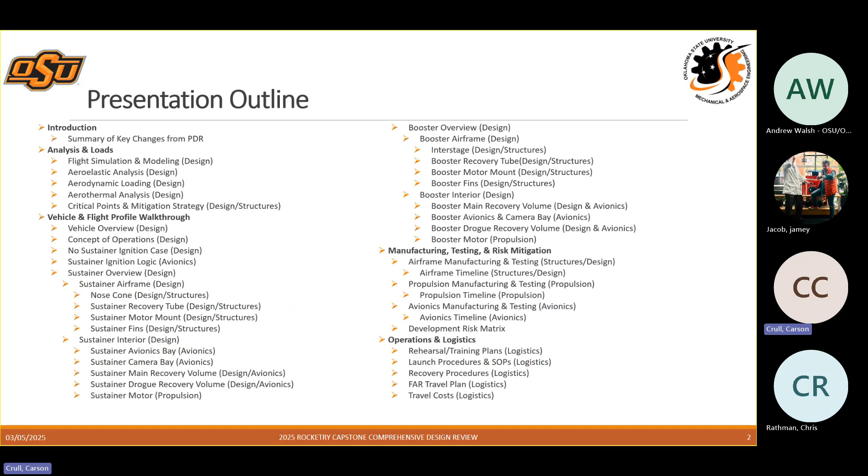Good afternoon. Welcome to this lovely Wednesday afternoon where we're going to be doing our comprehensive design review of Sundance, which is our 50-kilometer aerospace rocketry capstone project. Let's jump right into it. First up, we've got our outline, which is reference for us planning and also for people doing this in the future, so we'll see what the section breakdowns are. But we're going to go right into our summary of key changes from PDR. It's going to be at a very high level, and this will be the rest of the presentation.

We'll spend time going in detail on all these changes. These are the key points to watch for through the rest of the presentation. The major one is the confirmation and locking in of FAR as our launch site. Previously at PDR, we were hoping to have a launch site at the Osage Nation land north of Pawhuska. Unfortunately, that appears to have fallen through, so we have now fully committed to a launch at Friends of Amateur Rocketry, a highly regarded field out in California in the Mojave Desert. It's a very long drive away, about 22 hours, so we'll get into the logistics of getting the rocket and team over there, and some other considerations playing into that as well.

One of the chief changes is the redesign of the fins on both the sustainer and booster of the vehicle, driven by the tower at FAR. We're unfortunately abandoning the tower concept we'd been working on at PDR and moving forward using FAR's Newman 20-foot launch tower, which is designed to accommodate 4-fin rockets. We made a quick trade, deciding that the difficulty of adding more fins, performing the analysis, and validating that would be way easier than trying to haul our own tower out there. With that, we did some geometry adjustments, redid our flutter analysis, and increased those margins.

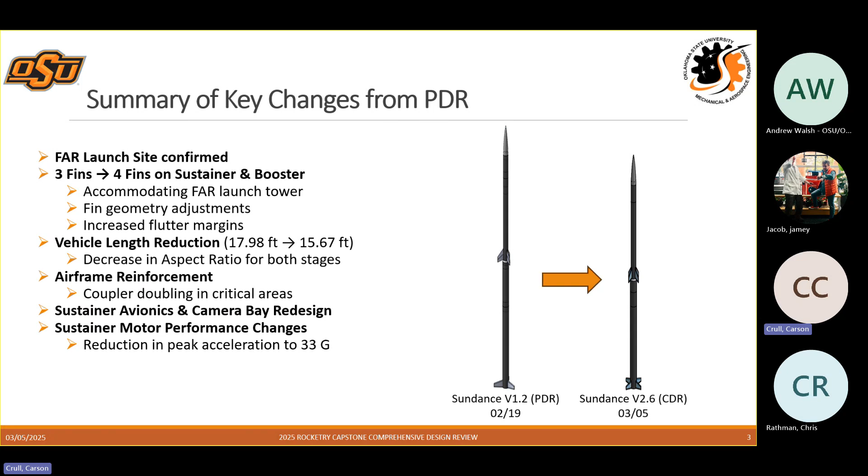I guess we're going to jump right into the vehicle walkthrough. We'll be handing this over to our design lead, Landon Votes, who will take you through the overview of the vehicle. All right, apologies, sorry, we're going to go analysis and methods first.

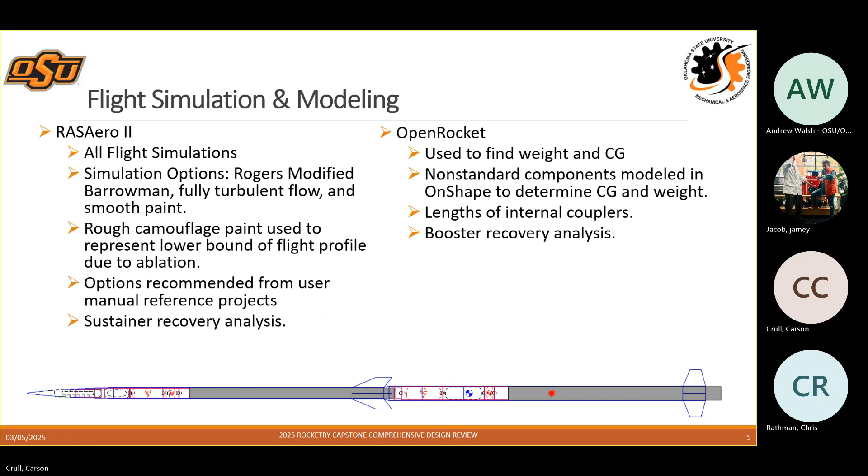Now moving into our static stability analysis. The stability margin is the distance from the center of gravity to the center of pressure, divided by the body diameter. You can pretty easily adjust this by changing your fins around, and you need at least one stability margin for subsonic and two for supersonic.

Now moving into dynamic stability. The static margin affects your dynamic response. The image on the left is our first 20 seconds of flight, generated from RASAero. One disadvantage of RASAero is that you can only select one wind velocity, and it stays the same for the whole height. So we're looking at using RocketPy to run more simulations specifically for winds, and Jackson's going to talk about that with our Monte Carlo sims coming up.

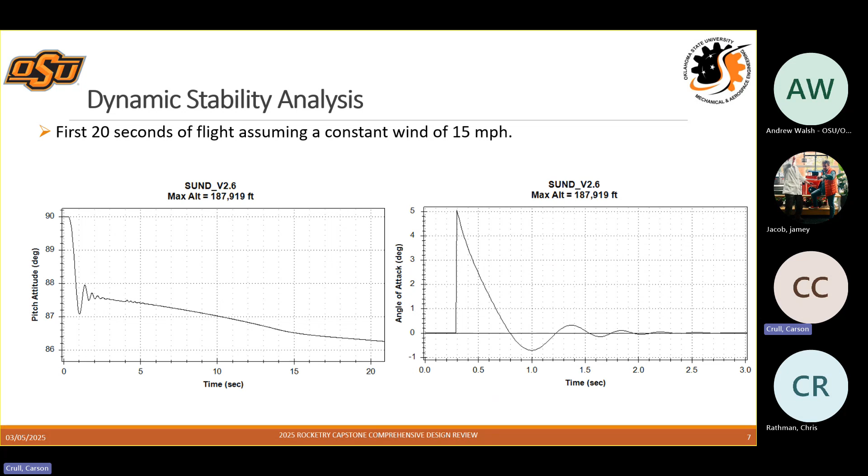We're going to jump into some Monte Carlo simulations, and we did have some updates from PDRs requested, accounting for the plus and minus 10% propulsion effects of the engines if it's either more powerful or less powerful than we expect.

And then we got the FAR atmospheric mapping. So we actually put in latitude, longitude, and elevation to get the wind degree and wind speed, as well as the air density mapped up all the way to 80,000 meters. This is going to be really critical when we talk about where the rocket's going to land, whether we're staying within a safe margin, and if it's going to be too windy on the day to launch.

Some of the initial results we had were keeping that under a 30-kilometer landing radius. We're seeing between 24 to 26 kilometers for our normal distribution curves, which we'll show on the next slide. We did have simulator consistency as well—OpenRocket's still showing that 26-kilometer radius, and we included the 10% motor performance to see the fluctuation in landing distance based on that.

As Landon mentioned, with RocketPy in the future, we're going to use the RocketPy library to take into account all the trajectory mapping with a 6 degree of freedom simulation. Essentially this is going to show a 3-axis chart displaying the parabolic trajectory of the rocket, so we can get a great idea of where it's going to land based on worst case wind loading. This will give us precise landing zones.

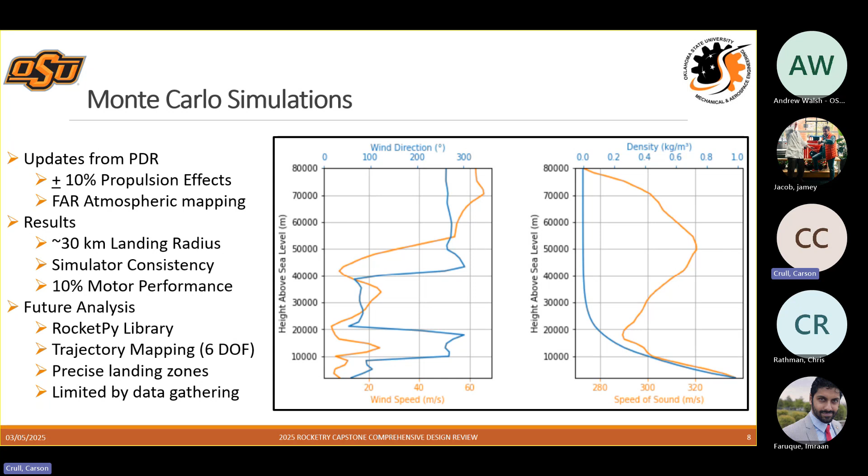One of the reasons we haven't got to this yet is the data gathering we have to go through. In order to successfully do this, we're going to need spreadsheets once the motor's finalized, and get all the grain profiles and burn profiles from that, plus stuff from the avionics bay and recovery system, to make sure the parachutes we're using are correct in RocketPy and things of that sort.

So going into our results, this is what we're seeing with our 2 degree of freedom simulation currently. With a 10% motor regression, we're seeing that normal distribution peak around 26 to 28 kilometers. With a 10% motor progression, we're seeing that drift closer to 30 kilometers, but still staying in that 26 to 28 range. Overall, this is consistent with what we've been seeing.

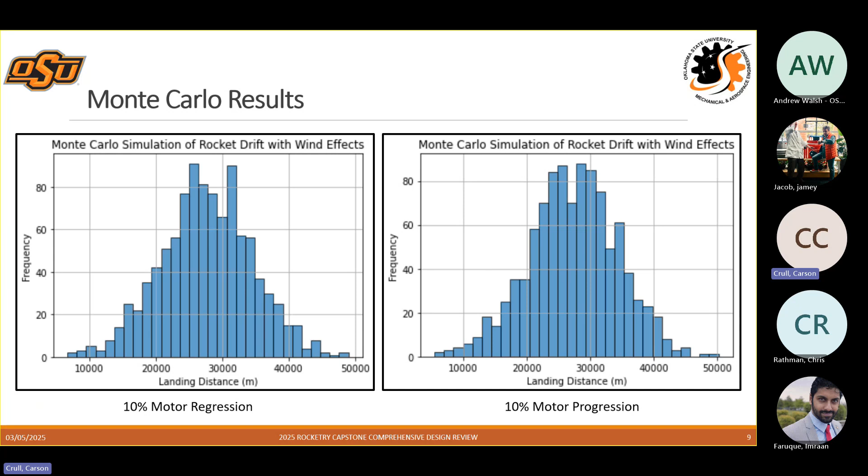One thing we might talk about in the future is once we get that RocketPy simulation done with a 6 degree of freedom simulation, to see how accurate that is compared to this. Obviously there will be some discrepancies, but what we're hoping is all the parachute geometry and stuff lowers this significantly.

Hi, my name is Dev. I'm a member of the design sub-team, and I'm going to be talking about the fin analysis and the methods we used. We used two methods: one using a software called AeroFinSim, and the other by hand calcs, using a method published by Apogee Rockets in newsletter issue 615.

For AeroFinSim, it takes the geometry of our fins as an input, as well as the altitude at which the set of fins experience max Mach. It uses these two equations to give us a fin flutter and divergence critical Mach number, which we cannot exceed.

For our hand calculations, we used the main equation shown on the right. We made a MathCAD file which calculates all those values and gives us the fin flutter Mach at the end. A key thing to note about this equation is that the 39.3 constant does depend on our fin geometry, so we recalculated that constant for both sets of fins.

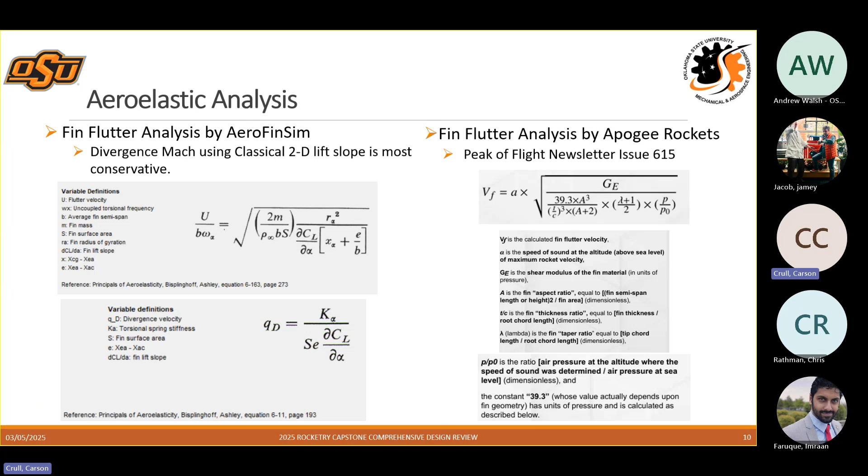We used two methods just to make sure that they validate each other and ensure that one doesn't drastically change the other. These results will be shown later.

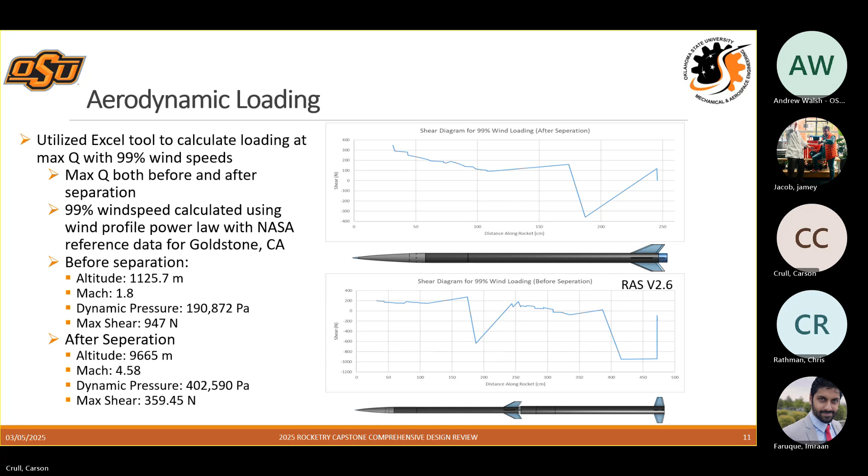We also did some analysis for our drag separation this time. How we did this is we found the drag produced by all of the different aerodynamic surfaces of our rocket, both sustainer and booster. Then we subtracted the sustainer drag from the booster drag to find out how much force was pulling our booster away from our sustainer.

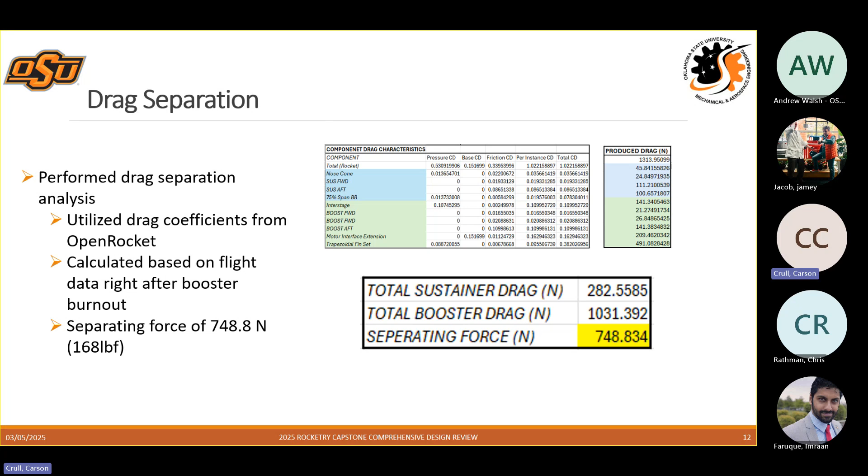Going into a lot of the aerothermal analysis, this has proved to be one of the more complex simulations we have to deal with. From PDR, we have an updated design render using the most up-to-date RAS Aero simulations. This gave us higher temperatures due to longer sustained supersonic flight.

A couple of the assumptions we made in the simulation was a fiberglass nose cone model with no ablative, to get the pure raw temperature on the surface if we didn't put something on there. This proved that the nose cone resin risked melting upwards of around 500 degrees Celsius, as well as we have conductive heat transfer to the E-bay and body tubes caused by the boundary layer.

On the heat flux topic, we're talking about 4 seconds to max heat flux from sustainer ignition, as the booster is not going as fast as the sustainer. So these are the higher temperatures we're expecting, as well as 8 seconds to around the max temperature, which is a lot longer than we saw on the PDR, which is why these temperatures are climbing and thus result in needing an ablative.

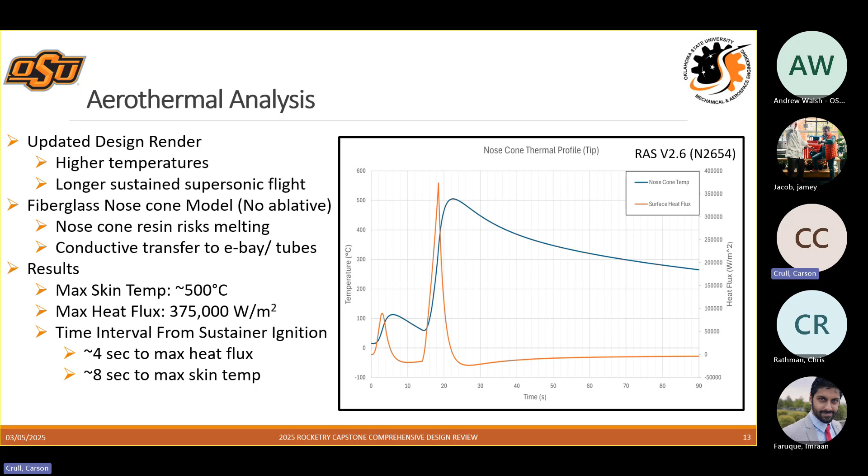This proves this will require an ablative coating, and what we see from this is we're above around 500 degrees right where that tip's going to start, and then all the way down to 400, and that temperature is going to keep decreasing as the rocket cools down and comes back down to altitude.

We ranged this just based on the material specifications in the code. So it's going to take a while to get the properties of the aluminum, size the aluminum tip, get the thickness we need. Aluminum also has a higher heating coefficient than fiberglass, so we've got to consider that as well, as that can conduct more heat to the nose cone, things of that nature.

Hi, my name is Chase Whitfield. I'm part of the structures sub-team, and I'll be talking a little bit about our composite airframe structural analysis.

So first, I'll just give a little summary of my approach. I made a MathCAD tool that does the analysis using classical laminate theory, or CLT.

To start out, I took our tow and epoxy properties that were given in the 54 millimeter tube we tested, and from there I was able to get the A, B, and D stiffness matrices calculated. After that, I took our max external loads, NX and MX, to compute the strain and curvature in the X direction. I took these at the maximum loading conditions under the critical sections, which we'll get into later. Also, this is just looking at a hollow tube, not with any couplers or extra thickness added to it.

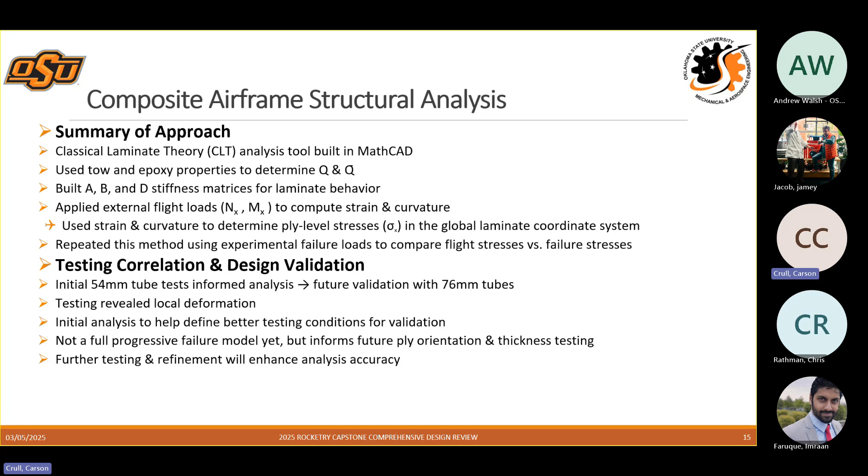So it's not quite a full progressive failure model yet. It still needs a little bit of refinement, but it helps inform future ply orientation and tube thickness testing moving forward. With that further testing and extra refinement, it'll enhance the analysis accuracy.

Again, our interstage coupler interfaces are of particular interest because that is what contributes to the slop along the overall length of the rocket. And there are also, in many cases, where our rocket will separate to start that recovery process, so multiple points of interest there.

Again, our nose cone tip interface, as you heard with the aerothermal analysis slides, we're going to have a lot of heating here, and a lot of stress just from where that aluminum tip interfaces with our fiberglass.

And then lastly, going off of what Chase covered in the previous slide, that preliminary structural analysis on our old design that you saw during PDR actually showed a negative margin of safety based on the material data from our 54 millimeter testing. So obviously steps need to be taken to address that. We're going to reevaluate these analyses with the results of our 76 and 98 millimeter tests. I'd like to reiterate this is very much preliminary, but it does help us inform these design decisions going forward.

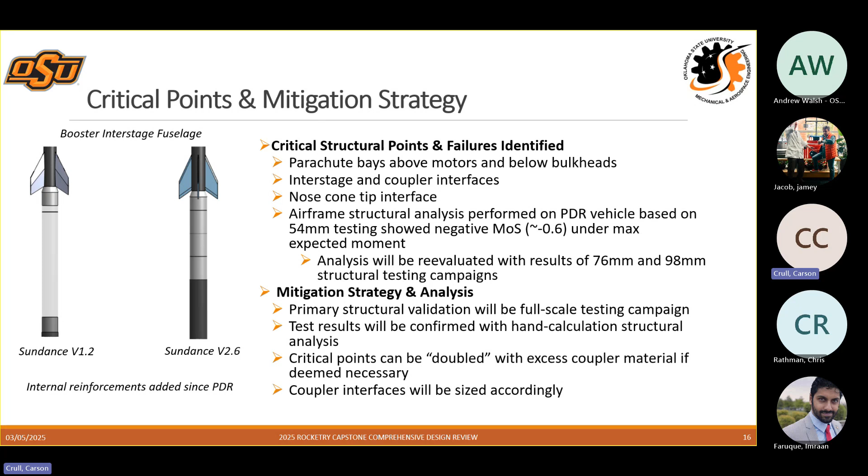And then lastly, as you can see in the images on the left, these critical points can be doubled where necessary with excess coupler material. So that's kind of our current approach. You can see the design change that we've made, and these interfaces will be sized accordingly based on those analyses and our testing results.

All right, so now we're going to go walk through the entire vehicle.

Starting with the overview of the entire Sundance rocket, the takeoff weight is a little heavier now, at 78 pounds, 3 pounds heavier. There's still 2 stages. The booster motor is the same, the Aerotech O5500X. The sustainer motor is different, and Trey's going to talk about this later, but it's still a custom OSU-made motor, though now the designation is N2888 instead of N3170. It still has the minimum diameter transition/interstage piece, where the booster outer diameter is 104 millimeters and the sustainer outer diameter is 80 millimeters, still made out of in-house carbon fiber wound body tubes.

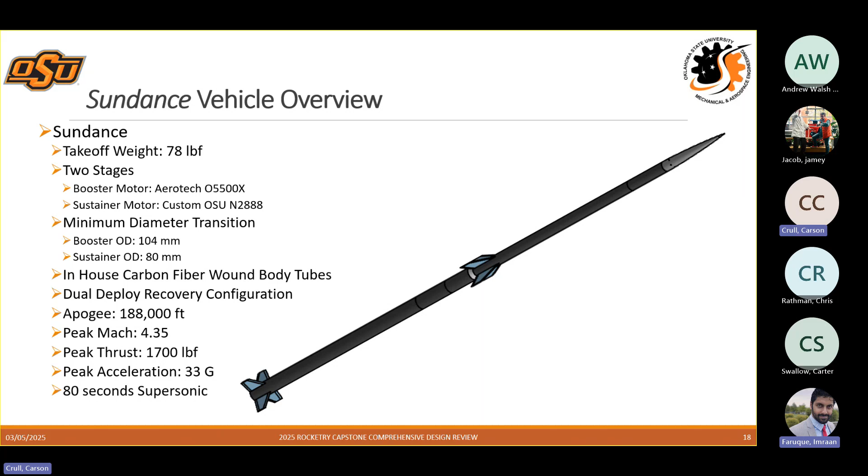Still with the dual deploy recovery configuration, our apogee is around where it was last time at 188,000 feet. Our peak Mach has decreased a little to 4.35. Our peak thrust is the same as before, driven by the O5500 at 1,700 pounds. One of the biggest changes is our peak acceleration has decreased from around 50 to 33 Gs, and that's due to the changes Trey's going to talk about with the custom OSU motor. We're still spending around 80 seconds of our total flight supersonic.

Now our concept of operations. The only things that have really changed here are our peak Mach number and altitude. We're still going to take off from our 20-foot Newman launch tower, now with 4 fins instead of 3. The booster is going to burn out at 5,000 feet after 4 seconds. If we follow the booster, it's going to continue to climb, lose velocity, and eventually reach apogee 25 seconds in. Our drogue is going to deploy at 15,000 feet. Then our booster descends until it reaches 2,000 feet, and the main parachute deploys from there. The booster lands 330 seconds into the flight.

Meanwhile, our sustainer continued to coast for 10 seconds after booster burnout. This 10 seconds keeps us above Mach 1 the whole time, so we don't drop below and shoot back up again. It also helps with that pitch attitude I was talking about earlier, keeping it as close to vertical as we can. Ignition occurs at 19,000 feet, and then our sustainer reaches max velocity 4 seconds later at 4,300 feet per second, at 29,000 feet.

The sustainer has a long coast all the way up to apogee, reaching 188,000 feet 115 seconds into flight. This is where the drogue will deploy, descending from 115 seconds to 700 seconds, a long time under drogue, just because of how high up in the atmosphere it is. At 5,000 feet, the sustainer's main parachute deploys 700 seconds into the flight, and about 250 seconds after that, or around 1,000 seconds into the whole flight, the sustainer will be on the ground. We'll touch on this as another change, the increase in elevation on the sustainer main deployment altitude, and we'll talk about that a bit later.

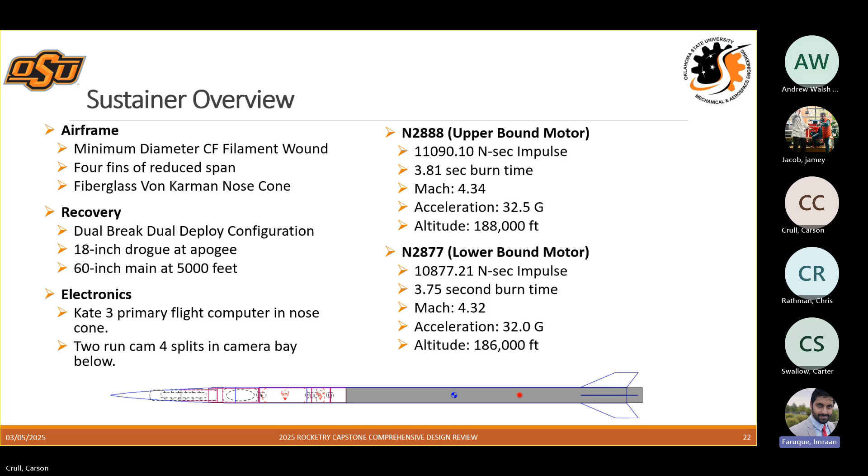Now going into the actual airframe, that's the carbon fiber, the black carbon fiber tubes you see in the image on the right. Our structural weight range is 8.14 to 9.24 pounds, so about 1.1 pounds difference. That's just taking into account what if our carbon fiber weighs 20% less than expected, and what if it weighs 20% more. It doesn't change the total weight of the rocket too much, so that's kind of what we're looking for there.

The overall length of the sustainer is 102 inches. The biggest part is the motor mount tube at 61.5 inches, so that'll be one full mandrel from structures. The recovery tube is smaller at 13.75 inches, that was one of the pieces we reduced in length to reduce the overall aspect ratio of the rocket. Our nose cone is at a solid 24 inches.

Our motor overhang, where the motor hangs off the back of the sustainer, the inner face with the interstage below, is one body diameter right now, so 2.99 inches or 76 millimeters. The outer diameter, including the thickness of the tubes, is 3.15 inches or 80 millimeters. The inner diameter is 2.99 inches or 76 millimeters, and the thickness is 79 thousandths or 2 millimeters. So the OD and thickness, the inner diameter is set by the mandrel, but the OD and thickness can change depending on the manufacturing methods and the results of our testing campaign.

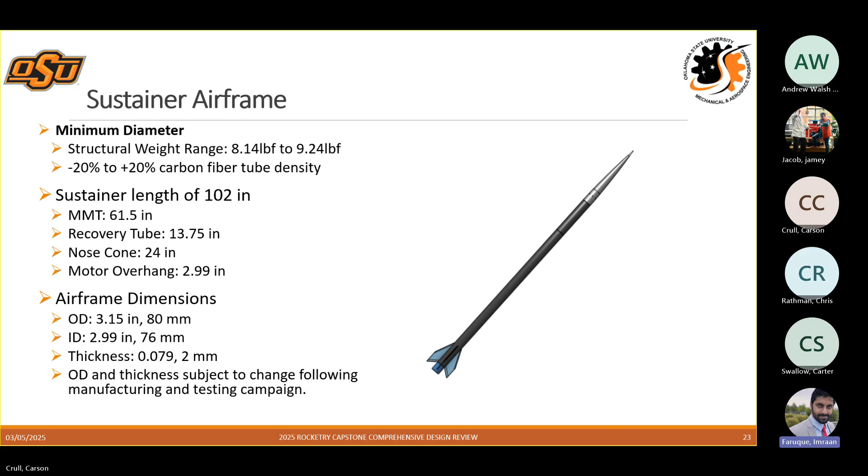For the nose cone, Ethan developed a manufacturing method we plan to use with a 3D printed mold, and we'll hopefully start that tomorrow. I've been working on the stress calculations, using the Newtonian flow method to determine the axial and radial force acting throughout the nose cone, done at a flight condition of 4.34 Mach and 29,000 feet. I also plan to do the classical laminate theory, which I'm currently working on to determine the ply number, and we plan to do testing on our fiberglass to get all of our ply properties for that. The predicted ablative regression requires a 1.5 millimeter thick coating for a factor of safety of 2.

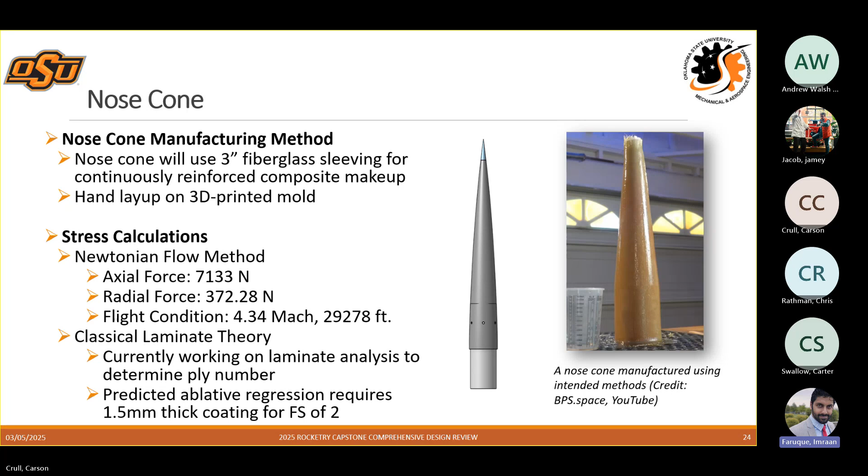Backing off what Anna said about the nose cone, we did a CFD analysis using ANSYS. A couple of the input flow conditions and simplifications we used: 2D axisymmetric flow to simplify the overall analysis so it wouldn't take weeks, and a 2D mesh with over 500 surface segments to increase accuracy. For input flow conditions, we have a max dynamic pressure given by RAS Aero V2 of what this rocket's flying at, which is around Mach 4.6. This Mach number differs from our updated simulation because this was run on an earlier simulation to see where we were at very high Mach numbers.

The temperature, pressure, and density were all around 28,500 feet, which is around the sustainer burnout—again, this differs because it's an earlier simulation. Another big simplification is a no-slip condition at the nose cone wall, to avoid viscous effects interacting with our rocket and its boundary layer. These results show pressure distribution over the entire rocket, ranging from 500,000 to 660,000 pascals, with about a 15 degree oblique shock from the tip of the nose cone based on the horizontal axis, and a pressure distribution for load validation and FEA. So we're working towards a full vehicle CFD analysis, which will give us a pressure distribution over the entire rocket so we can make further changes to the airframe, fins, or anything else. Structures will get into more of that later.

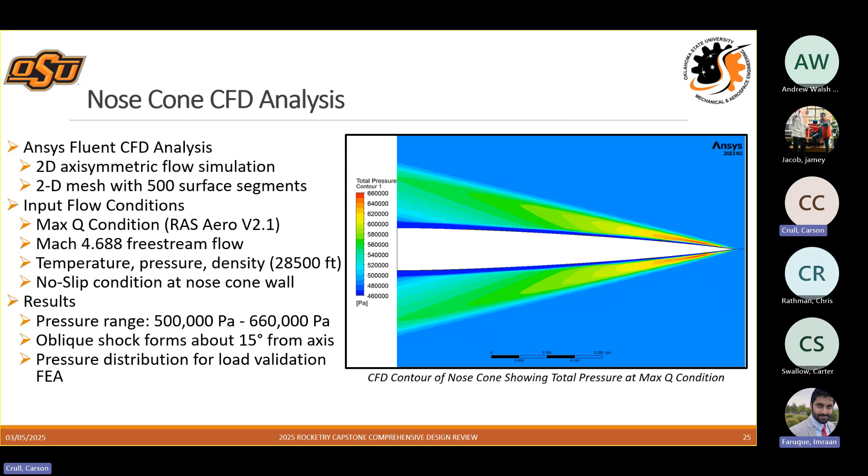Now moving down the rocket, the next piece is the sustainer recovery tube. The upper part houses our main, and the lower part houses our drogue. The black part you see is 18.5 inches of carbon fiber. It's joined to the nose cone with a roughly 10-inch coupler, and joined to the sustainer motor mount tube below it with an 8.98-inch coupler. The parachute bulkhead is right in the middle, dividing them, with an eye bolt on both sides so the recovery is attached at the same spot. The shear pins are below the shear line or joint at each interface—for this, the motor mount tube would slide up here, and the shear pins would be in this section. This is the sliding part of the coupler, which is also 1.5 times the body diameter on both the sustainer and the booster. This gives you a good interface.

If your tolerances are good, you'll minimize the slop there. If you go longer, you're increasing the overall aspect ratio of your airframe, and also the chance that it won't actually separate because there's too much friction. So 1.5 is a happy medium there.

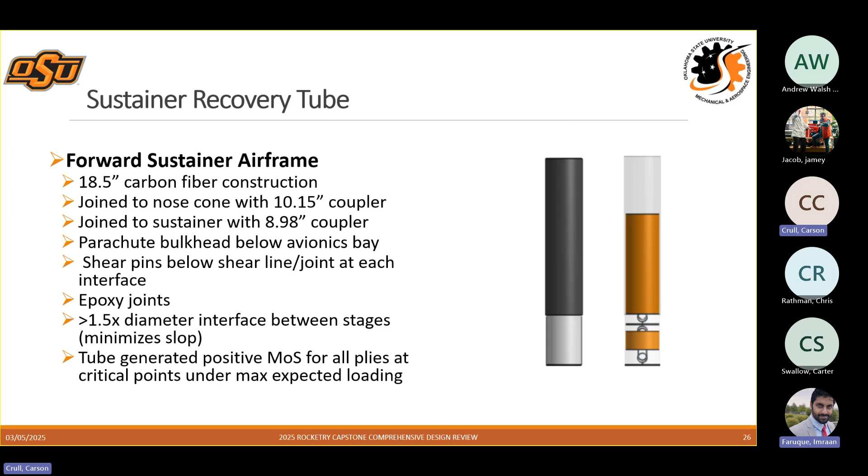This tube generated positive margin of safety for all the plies at critical points under max expected loading, because of the additional coupler and reinforcements we added in that area. We'll see that later.

Now moving further down the rocket, we get to the sustainer motor mount tube. That's the very long 61.4 inch carbon fiber piece. It is joined to the forward airframe with the same 8.98 inch coupler, and then it's joined to the interstage with the motor case, which is this blue piece hanging out 3 inches. It interfaces with the interstage below that. Also living in this tube is the drogue parachute and our custom motor retainer.

All the bulkheads on the entire rocket are epoxied in place, and our custom retainer basically works with the forward closure on the actual motor, and then we have a bolt that goes through there, threads into a slot on the top of the retainer, and we tighten that until it fully interfaces with our epoxied-in-place retainer. This has to be custom because commercial retainers have a center threaded piece, and we have to do a slight offset to accommodate the head end ignition. The shear pin connection is also below the shear line on this one as well.

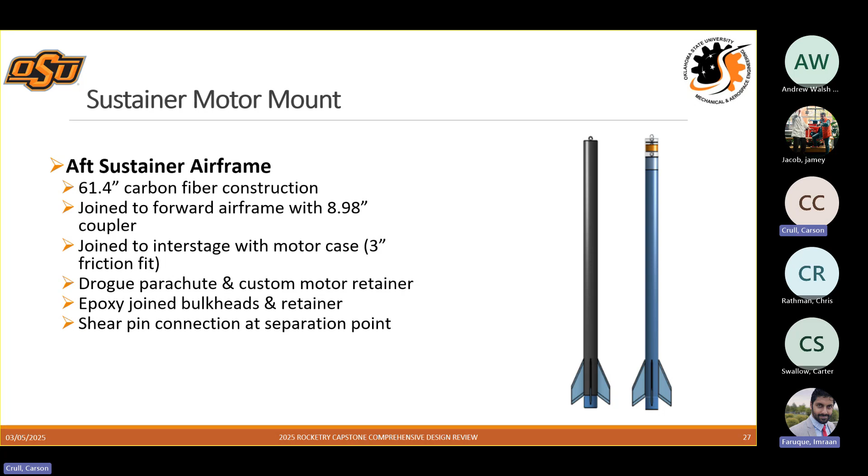Looking at our sustainer fins, besides the main change from going from 3 to 4 fins, the biggest change we made is going from double wedge to hexagonal cross section. In simulations, this change didn't have that big of a performance difference, and hexagonal fins are easier to manufacture and more robust, so we decided to switch. They're also highly swept, which is needed since the sustainer is going to go Mach 4.3 - a highly swept fin helps with performance at that speed. The current plan is to construct these fins out of 6061 aluminum with epoxy fillets.

Using this material and geometry, we can conduct fin flutter analysis using the methods previously discussed. The critical Mach number from AeroFinSim is about 9.5, and by hand calculation it's about 12.1 - about a 2.5 difference, which is quite significant. However, the average factor of safety we get is 2.5, which is ideal, making this a good sustainer fin design.

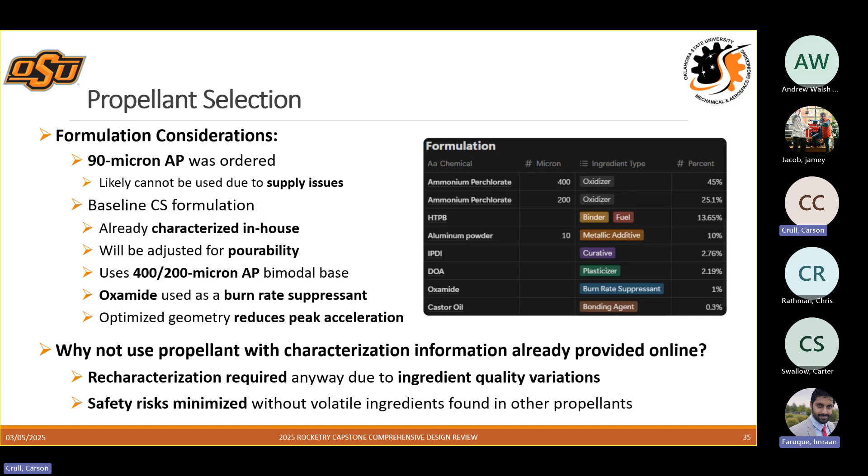So it's been mentioned, the performance bounding of our motor design. I'll explain a little bit more about what that is. Since we were originally planning to utilize 90 micron AP and we can't do that, we use this bounding approach. Our baseline propellant, already characterized, needs to be refined for improved pourability. So to make sure our final design is suitable for loading and such, we define two bounds to guide our motor development.

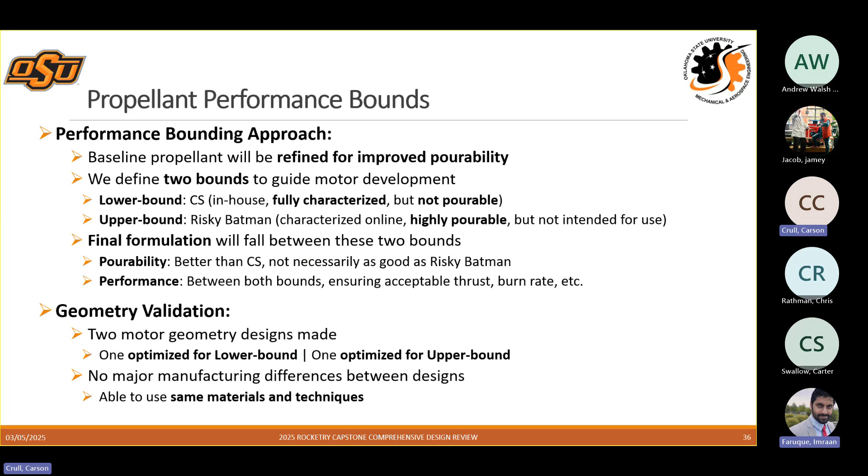Also in terms of performance, we were able to optimize geometries for both the upper bound and lower bound, so that we know the performance of our final motor will fall between those two bounds. We optimized a geometry for both propellants, one optimized for CS and one optimized for Risky Batman, and concluded that there are no major manufacturing differences between the designs, and that we would be able to use the same materials and same manufacturing techniques.

All right, so now that we're done with the sustainer, we're going to move into the booster overview. Still the minimum, same carbon tubes. We did reduce the 4 fins and reduce their span, which helped us with the flutter velocity. On these, we also slightly increased the thickness.

On top of our boosters, our 6061 T6 aluminum interstage provides the connection point between the two stages. The recovery is the same dual break dual deploy as the sustainer. There's a larger drogue and larger main, just because of the increased mass of the booster.

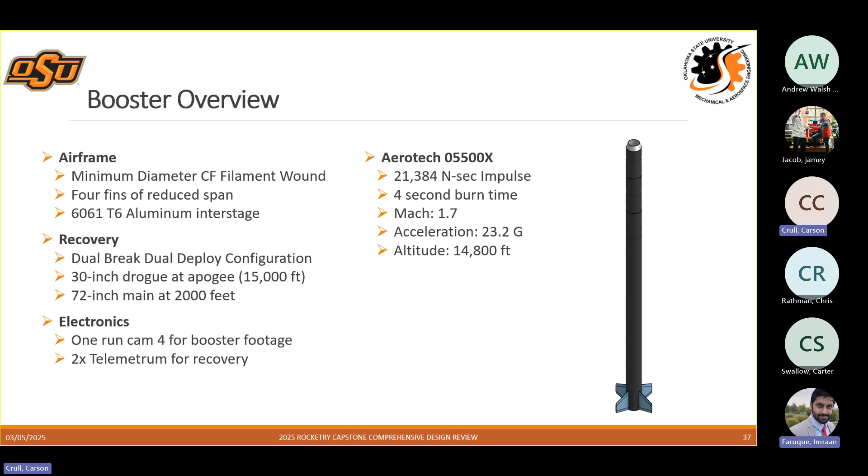The electronics include one RunCam 4 for our booster footage, and then two Telemetrums for recovery, which are some other commercial flight computers. The motor for this booster is still the Aerotech O5500X with 21,384 Newton-second total impulse, 4-second burn time. That's going to push the whole booster and sustainer stack at separation to Mach 1.7, peak acceleration of 23.2 Gs, and altitude of 14,800 feet.

For the airframe, we did the same positive and negative 20% carbon fiber analysis, and that put us at a similar difference of 10.9 to 12.3, a little more variance there just because there's more carbon on it. The booster's length is 94 inches, with the largest segment being the aft booster, or the motor mount, at 67.3 inches.

The forward booster, which is kind of the recovery volume, is 20.8 inches. Our interstage, the part that's actually visible to the air, is 1.5 inches long. And our motor overhang is 4.4 inches.

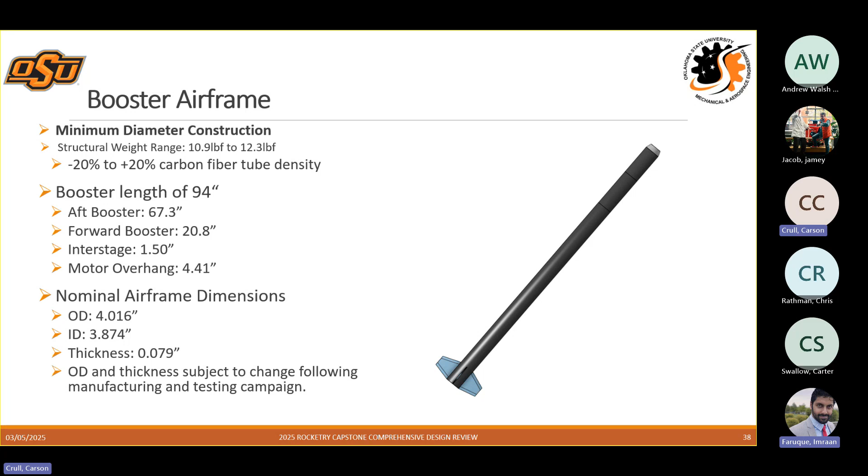The nominal dimensions, like I said earlier, are an OD of 4.016, an ID of 3.874, and still the same thickness of 79 thousandths or 2 millimeters. Same disclaimer that the OD and thickness are subject to change following our manufacturing and testing campaign.

Yeah Josh, you got the interstage. So taking a look at our interstage, there's been very few design changes between PDR and CDR. Our material is still 6061 T6 aluminum, just for availability, as mentioned previously. It's important to note that this aluminum construction allows us to get really tight tolerances around that interstage to sustainer connection, since it interfaces with the sustainer motor.

You see an aluminum to aluminum interface there. Yes, thank you. Another small design change is that we added a sloped aft side to more smoothly transition the stresses between the airframes. But other than that, it's remained the same.

It will still be drag separated and still transition from 98 to 76 millimeters. We've done some preliminary FEA on this joint to simulate both the compressive loading at max Q on the boost stage, as well as a 9-degree angle of attack gust loading, which is extremely conservative. I think our 99% wind analysis only set us around somewhere like 4.6 degrees.

This preliminary FEA aligns very well with the compressive hand calculations that were completed, but we're still looking to refine this study. As a team, we don't have a ton of in-depth experience with FEA, so we're still looking to improve this and get more accurate results. But yeah, we're very confident in this part of the design.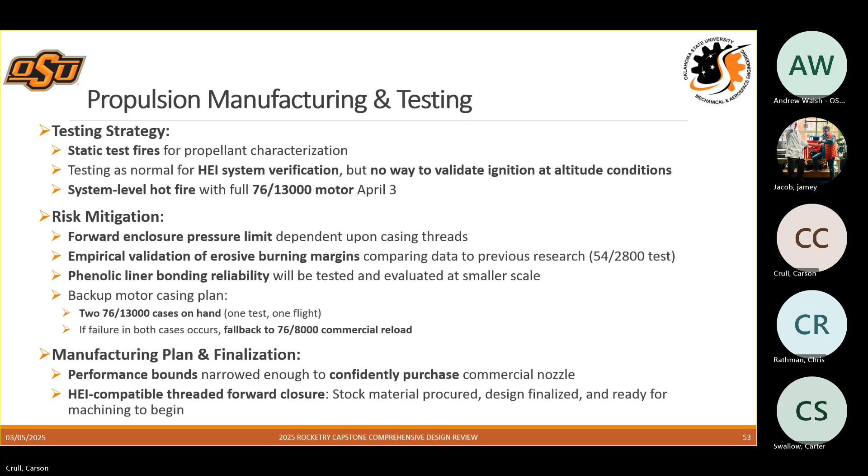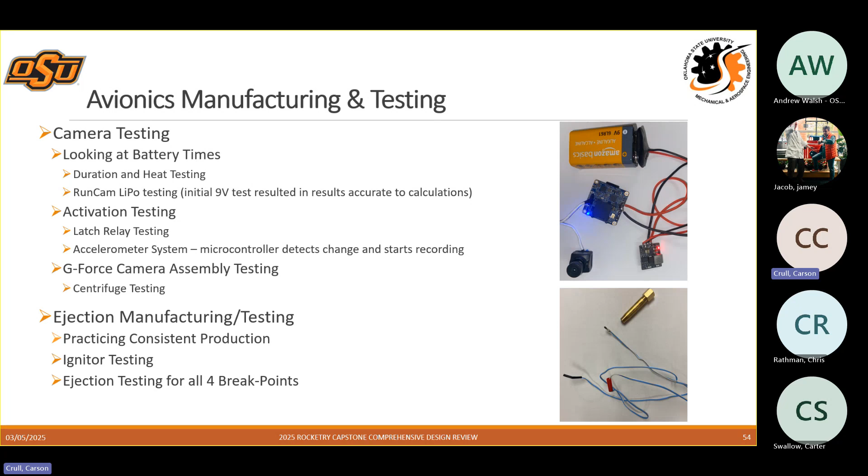Yeah, but real fast—my name is Joey, I'm one of the guys working on all the cameras, and I'm going to really quickly run through our timeline and then also talk about the actual camera designs.

So as far as avionics is concerned, right after CDR, we're going to go ahead and do all of our updates and make sure we have all of our procurements in, because we do have a lot of off-the-shelf products that we are using for these circuit designs and for the actual avionics components.

By the 8th, we're going to get started with 3D printing. We're going to do our weight testing and charge testing on all of our materials and make sure those actually meet the criteria that we need them to for launch.

By the 9th, we're going to make sure we have everything assembled so we can actually start testing our accelerometer power distribution system, making sure that it's functioning correctly for the booster.

By the 13th, we're going to make sure and get started on doing a full sustainer and booster avionics and camera bay testing and assembly.

By the week of the 24th, we're going to get started on doing our ejection testing and our full bay testing, making sure that everything comes together—the ejection charges work, cameras work, avionics bays are fully functioning, ready to go.

The week of the 31st, we're going to get started and hopefully get everything done for programming the Kate 3, as far as getting the sustainer working and making sure it can actually eject all of the charges, target the cameras, and start recording. We'll continue with any extra assembly and testing needed for that week.

The week of April 7th will be our final build and assembly week, to make sure we are flight ready by the 13th of April.

As far as the cameras are concerned, we have a big issue with reliability, which is why we have 3 different designs. Our first design is our primary design that's going in the sustainer. This is our solid state relay on the Kate 3 that will fire a latch relay to start recording the camera. The cool thing is we can dictate when this starts remotely via the Kate's receiver, giving us the highest likelihood and reliability of capturing every aspect of the flight.

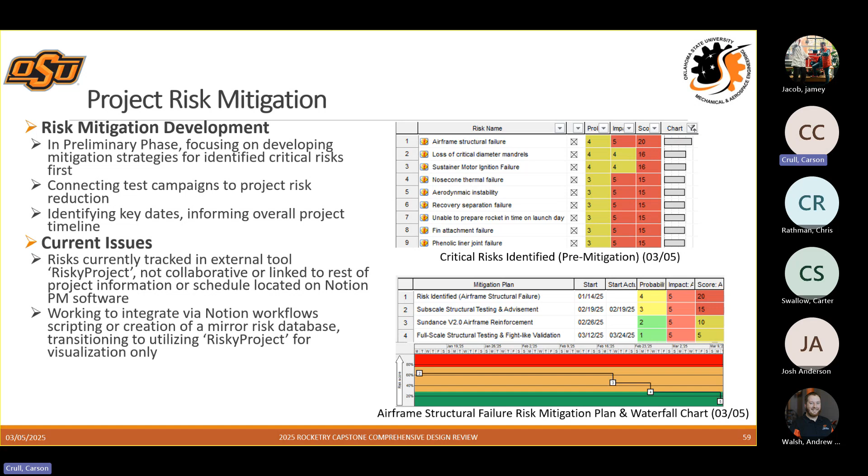One thing we are tracking - if we go to the previous slide, the master list here under propulsion, we do have the forward closure failure and phenolic liner. These ones are already addressed. We see them as much less likely because, already going through that testing campaign, we'll have the opportunity to bring that likelihood way down with the full scale test.

So these aren't necessarily the current ones, these are hopeful - this is prior to mitigation, so these haven't been mitigated yet. Keeping cognizant that it's a bit of a compromise, because these haven't been mitigated yet, but the probability is kind of affected by how easy the mitigation is going to be.

In terms of things like the motor having a structural failure, a pressure failure in the forward closure, or liner failure, these are things that are going to be proven by our test campaign. So we rated them lower in our initial identifications, and they'll go even lower once those tests have been conducted.

Okay, well after we get through those gates, I'm going to be able to come back and reevaluate.

There's one thing - I don't want to go back to the slide, but I do want to come back to some of the modeling validation components, particularly the Monte Carlo components. We'll go into a little more depth about how you did that later, but we're not going to do that here. Also, as you're going through the process of refining and getting to know your subsystems and your rocket better, continually improve those verifications in the simulation so you know what you're getting. You'll be able to refine that. At the end of the day, if you keep doing that really well, you should be able to pinpoint and get your targets.

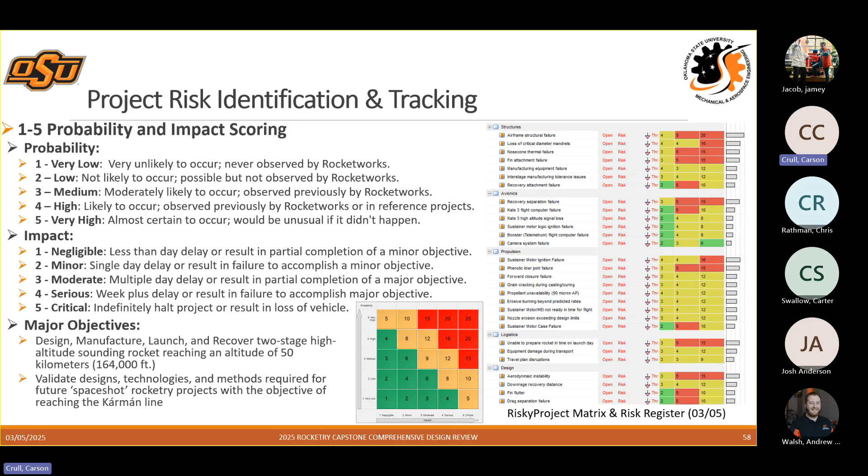But that is a very critical thing - if we do lose that GPS, it's going to be very hard to impossible to find this thing. So that's one of the risks that we're tracking there.

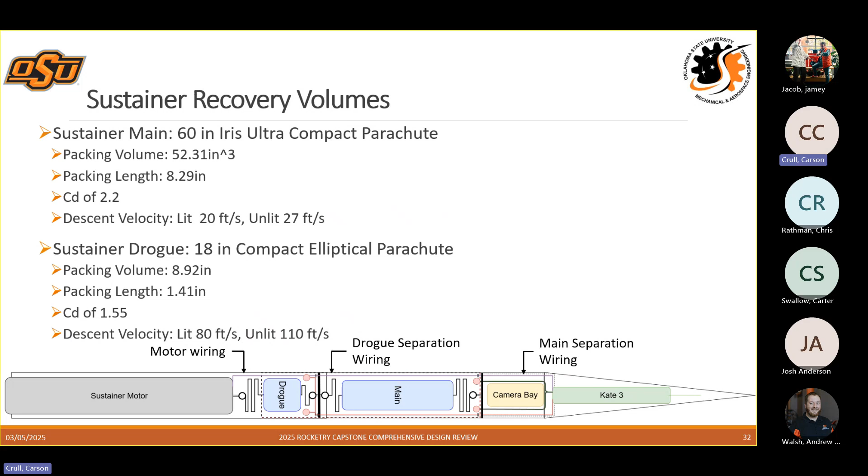You mentioned that you're gluing the phenolic liner together, and that's recommended. The 76/13000 case is manufactured by Loki, run by a guy named Scott, and we stay in contact with him quite a bit. The 76/13000 case is one of the few cases where you actually have to do this, and he has developed his own tried and true method of bonding phenolic liners together. We have step-by-step instructions, SOPs, to follow for this. We're going to do some smaller test campaigns during the same time as our propellant characterization to verify on a smaller scale, and then we'll move up from there as we go towards the full hot fire.

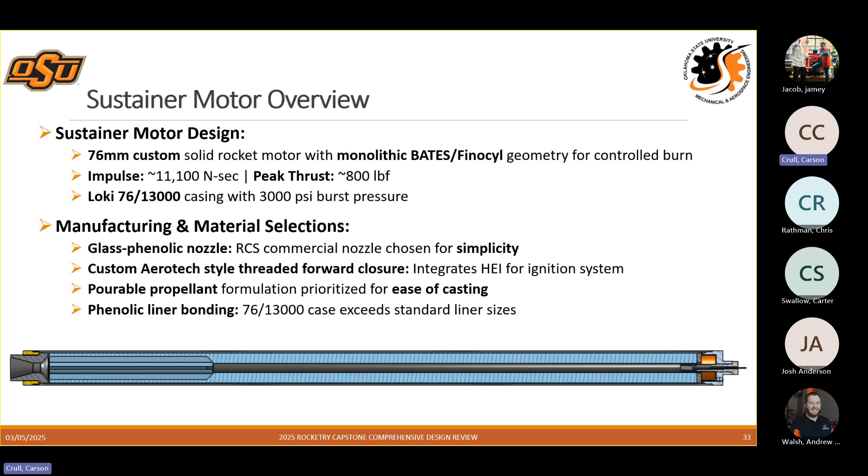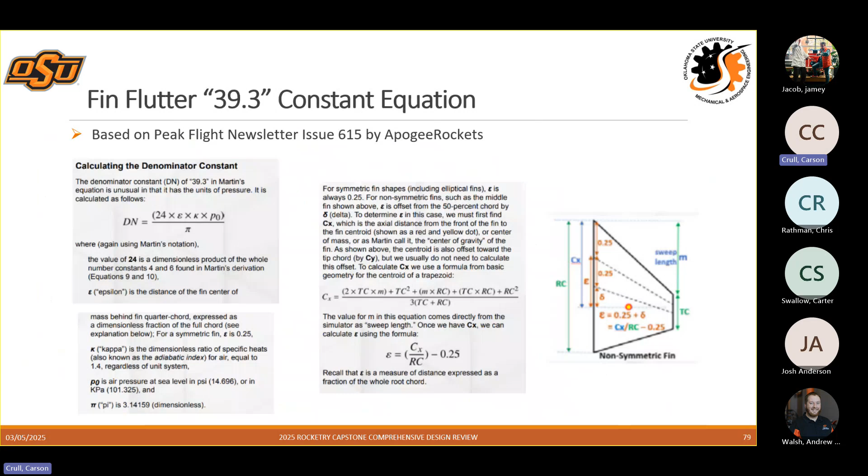Yeah, that seems like it's probably critical. We actually do have the backup slide, it's way down there, but I can go find it. Do you know, can you get the slide? It's like 98 or something. 98? Yeah, it's way down. Can someone give me a number?

There we go. So this is kind of like a summary of his exact process. But you haven't done this yet? No. Okay, so obviously it's one of the first steps. Yes, anything that you haven't done or didn't have experience with. Yes, and that is in our plan to do within this week. Okay, that's good for me.

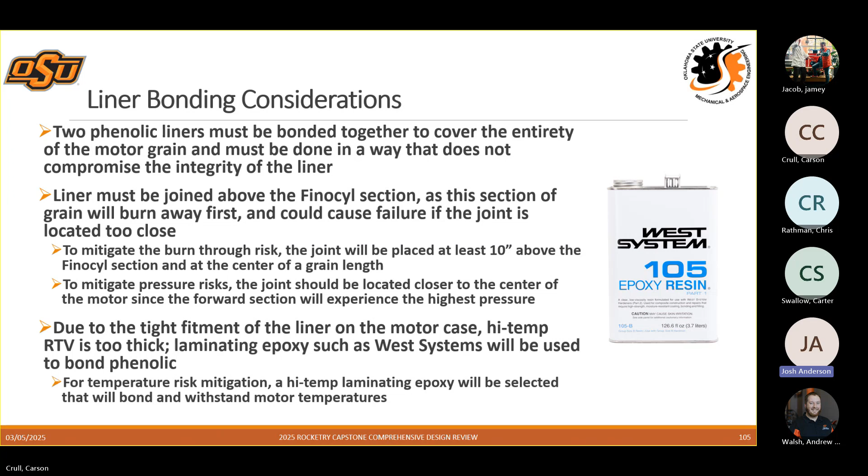And let's go online. All right, so go ahead, I think Josh was first. I joined late a little bit, but would you be able to go back to your motor sim slide that you just passed? I just wanted to look at it. Oh, Chris can ask his question as you go back to that backup slide, right? Let me see, was it this one? So the lower and upper bound - do you want to start with this one? Yeah, what if there's a specific question? I didn't have a question, I just wanted to look at it for a little bit. So you can go to Chris and I'll just stare at this. Yeah, Josh just likes to look at motor simulations, that's first, this is fun.

All right, Chris, you want to go? Yeah, okay, so I'll start with one that's not propulsion related. What is your shock cord material are you guys using? I think we're using the ripstop Kevlar - that was the baseline for that, unless we made any changes. I don't think we put it on the slide though, but that's the current baseline, yeah.

Okay, and then have you guys verified that you're able to pack down your chutes and your shock cord down to the space requirements that you're giving yourself? Yeah, so that is one of the things that we had done in between PDR and CDR was really trying to size the recovery volumes. On the Fruity Chutes website, they have a weight listed and also a packing density - the reported volume is 0.18 ounces per cubic inch, using a packing bag or a deployment bag. We could use that, or we could size it based off the traditional Z-fold method, which is a slightly lower density of 0.13 ounces per cubic inch. So we basically use that density and the mass of the parachute to figure out how much length in the rocket needed to be dedicated to that. But that is another test that we want to do - actually procure these parachutes and then verify that they will fit.

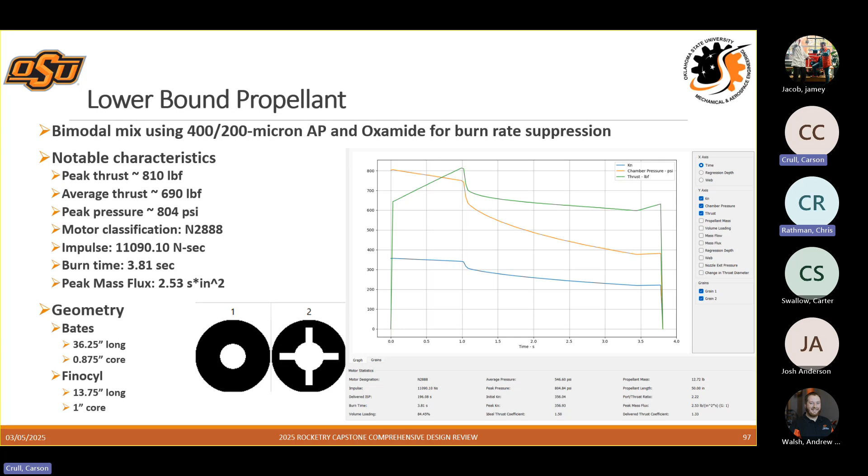Is there a backup slide with the calculator? That's true. Yeah. Can someone give me a number? We've been able to develop this propellant calculator where we can input our desired motor geometries and our desired ratios of propellant ingredients, and it will ensure things such as the cure index are within desired range.

So we can know more about how it's going to cure and the pourability and things of that nature. It's also worth mentioning we feel comfortable increasing the aluminum content because our base propellant already has a very low metals percentage, so we have quite a bit of margin to play with there.

And do you recall the paper this was based off of? Do you know the author of that? John DeMar. Yes, DeMar. Okay, I was just wondering in case they were... Thanks, John. That's what at least the liquids pourability aspect of this sheet is based off of, that paper by DeMar.

Okay, and then are you guys planning on using that same propellant formula for both the booster and sustainer? Yeah, we're using a commercial booster, so this is only for the sustainer.

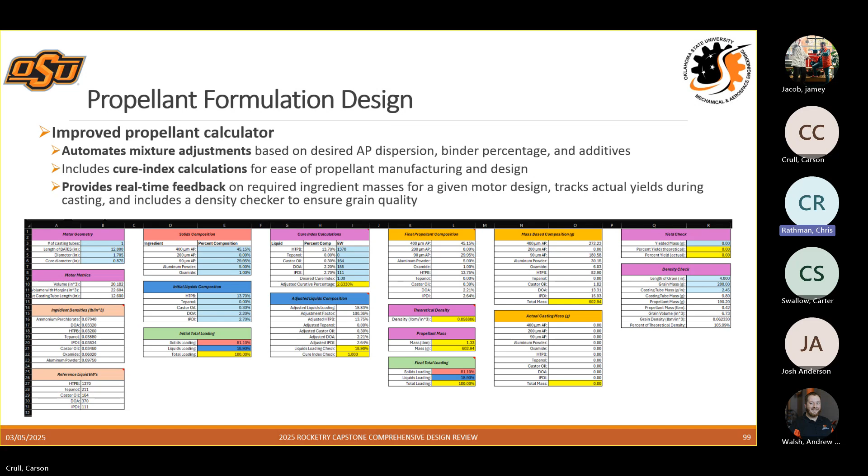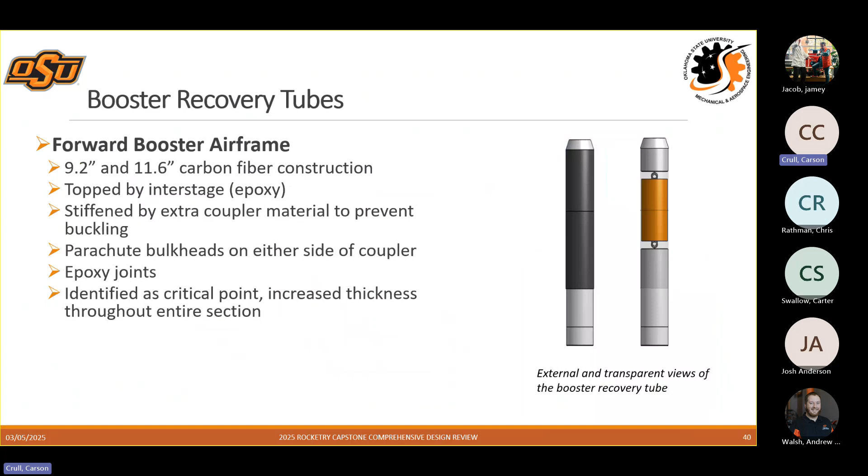Okay, so that answers my next question. What is that? I must have missed that. What is your booster commercial motor that you're using? Yeah, I'll go back. It's the Aerotech O5500X. Oh, we've got a little slide back over here. Did I pass it? Whoops, there we go.

But yeah, this is a workhorse of a motor, very high initial thrust. That's very good for our application because we really do not have to worry at all about making sure we're stable off the rail. This thing's got a really big kick to it initially. We've also got club heritage with this motor.

We've flown it prior on Arachne, which was our successful flight to just under 26,000 feet out at Argonia, designed for the Spaceport America 30,000 foot COTS category. So we're familiar with it, and as far as operations concerns, like getting this thing ready the day before launch, we've already conducted this, and a lot of members of the capstone team have hands-on experience preparing this motor before. So that's a big consideration as to why it was chosen. But yeah, does that answer your question there?

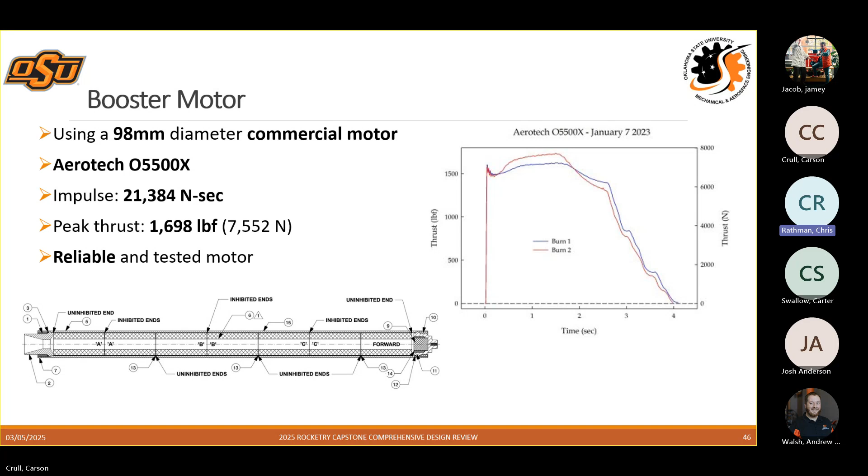Yeah, that answers it. I think my last question I've got for you guys is on your staging slide, you have a 10-second... your booster burnout between 10 seconds and 30 seconds or time, that very last bullet point there. Have you guys considered reducing that?

And as part of this, what is your stability at this point in flight? Yeah, we can answer all those questions.

The first thing is we've been looking a lot into justifying this particular decision for the 10-second coast. We've already mentioned Mesos as far as the interstage design change we did. Mesos is honestly a very similar rocket to this design, going to 293,000 feet as opposed to our projected 188,000 feet, accomplishing that by using long burn duration motors. A huge part of that was they did a 17-second coast with a very similar aspect ratio, very similar weight vehicle as the one we're doing.

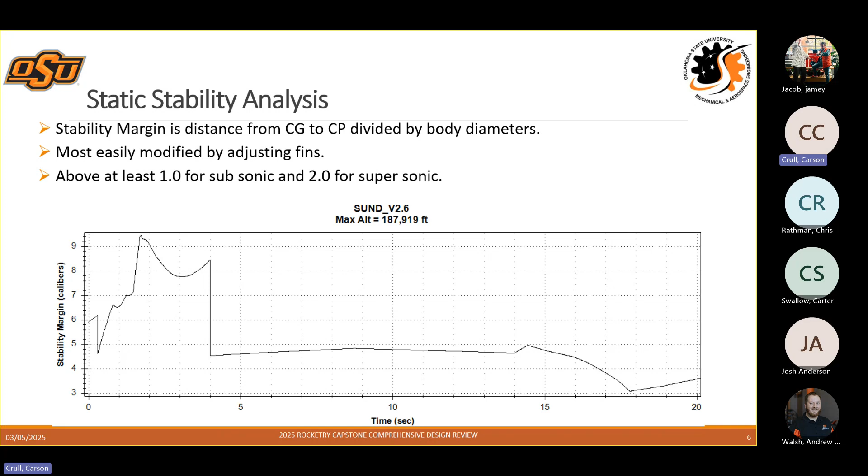So my questions are probably mostly for Josh in manufacturing, especially when it comes to airframe. You outlined a critical path for 3 days, all hands on deck. What is all hands on deck?

So that would be all hands of the structures team, if they're willing to work 9 to 5. Obviously, we're going to have a lot of extra hands from the design team, whose work will be pretty much completed at this stage of the project. Obviously, there are a few small items they're tracking, but nothing major, and so they've expressed an intent for wanting to get involved with the hands-on stuff.

So at the end of the day, if it comes down to it, we could probably get 20 people in there if we need to, if it's the difference between getting a rocket made or not. But with the timeline we've given ourselves, this will include just the structures team plus a few additional people.

So this is enough to operate both lines continuously, and also have people—there's some downtime here as well—but basically enough people on each of these tubes or each nose cone part to be able to sand it down, not lathe it off. I'd say lathe off is really putting it on the lathe and just sanding it smooth on the internal and external surfaces. But having enough people, we've been able to do solo line operations, especially with some of the automation we've implemented on that.

So this really could be fully accomplished by the structures team, but if there is additional hands needed, especially in terms of simultaneous assembly tasks going on, like getting these things staged as the rest of the vehicle is put together, the entire team can pitch in there.

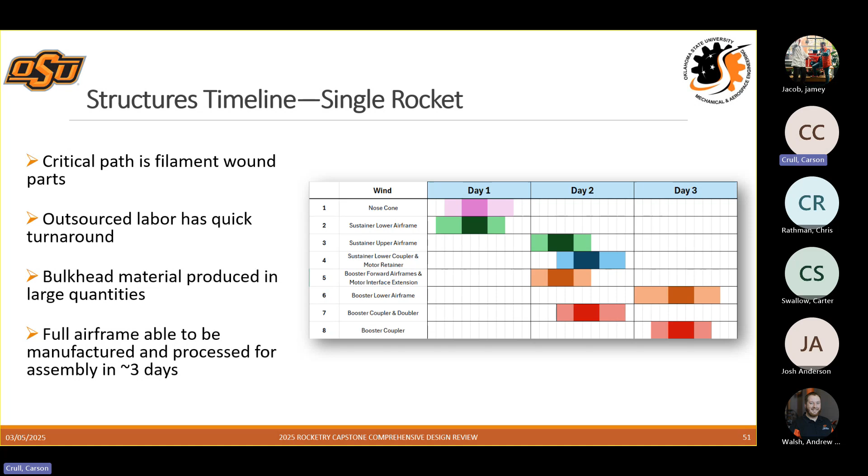On the interstage, since you ran FEA and have a material selected, is that going to be made in-house? We haven't decided yet. Our number one option is using Shorty's machine shop, which we've had good experiences with. It's really a matter of our confidence in the machine shop, and it's a relatively simple lathe operation, but I haven't talked to anyone on our team yet who's confident enough in their lathe abilities to manufacture that part. So right now our intention is to outsource.

Do you have enough lead time? Typically turnaround from Shorty's on the mandrels was 2 or 3 days at most, he's very quick. Some of that geometry is a bit complex for a lathe operation, so I see it possibly being a CNC lathe operation, which I'm not 100% sure Shorty's has. That was my question too, about outsourced labor with a quick turnaround. You'd call that out.

How reliant do you think you'll be on that if you need it? You have 4 weeks. Ideally, now that this design is finalized, this is one of the parts, along with the head-end ignition, and fins, that we'll get in contact with the staff about. Even if it's not a possibility with them, we can look at other options, so we're not too worried about that setting us back. Obviously it doesn't have to detract you, you're correct to raise concern about it. I didn't know if you had identified any other machine shops. The DML does have a CNC lathe, but we don't have a high level of confidence on that.

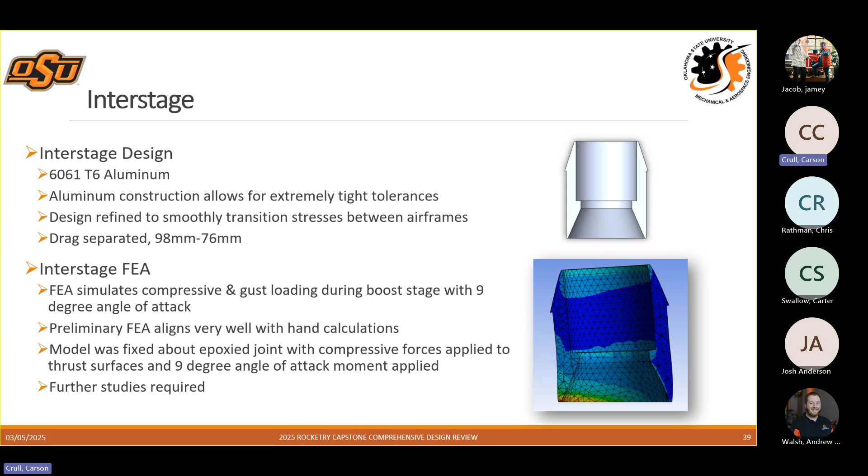So we're getting there. I'll mention that the propulsion team has reached out to Shorty, and obviously we won't know until we get the part back, but he's claimed he's able to machine it. For reference, that's this part right there. He's claimed he can do it, so we won't know until he does it.

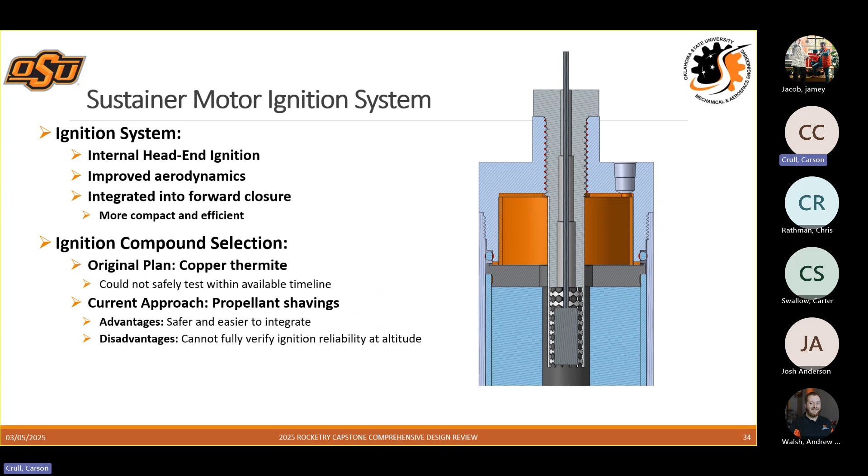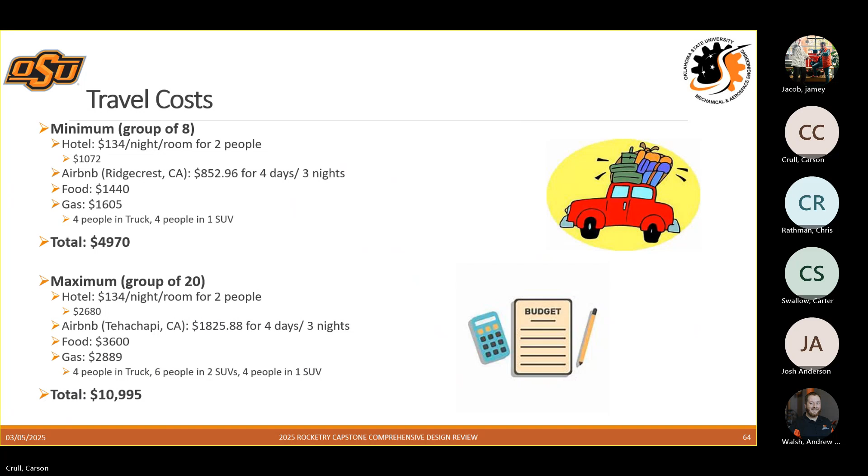You have to be over 21 for that, I'm sure all of you are. Yes. And the cost associated, just so you know, 3 vehicles is going to be close to $5,000. Yes, the motor pool loves us. Because they charge by day and by mile, and then you get charged for your gas card. I wish they would charge by opening the door too, so every time you get in a vehicle, just something to be aware of.

I think the $5,000 8-person plan is a bit optimistic. We've sent teams to Arlington for $7,000 through Motor Pool. The truck is $90 a day, 80 cents a mile, so something to think about.

Yes, if people are willing to use personal vehicles where we can, and then have a few motor pool vehicles as well. That's another thing I think we might have glossed over. As far as logistics planning, I think our contingency is the 8-person case, we're essentially committed to being able to bring 8 people out there. With FAR, they have a hard limit of 20 members, including spectators, everyone affiliated with the rocket, so we're going to be able to bring... and again, we have a 24-person team.

So we're only able to bring 20 people out. Part of the work we're going to be doing in the next few weeks is identifying who these 20 people are, and where we need subject matter experts. Additionally, other students who are not on the team that we want to bring in, based on wanting to give team members as much priority as possible if we want everyone to get out there, but weighing who we need out there, just to have the most benefit to getting this project a successful launch.

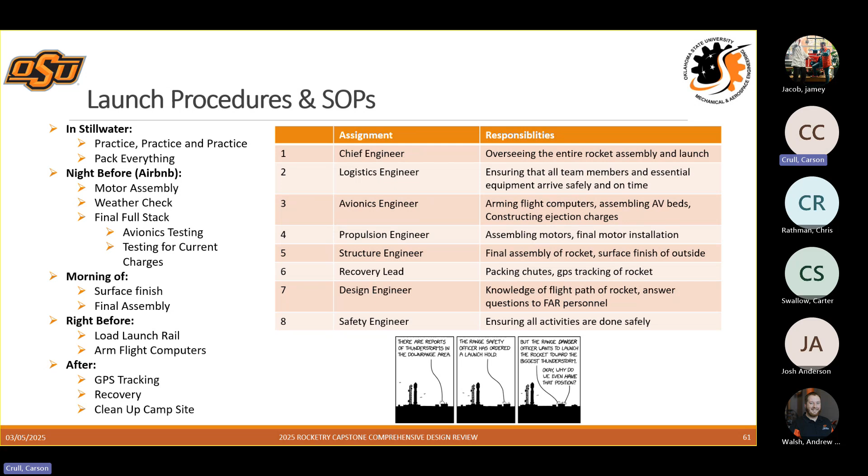The big one I had was your fin attachment and your fin analysis. So your fillets are leading edges, right? And your fin leading edges are also to be considered an area of aeroheating. Have you all done calculations on what that aeroheating looks like on those fins, especially the fillets, and what epoxy you're going to use to attach that?

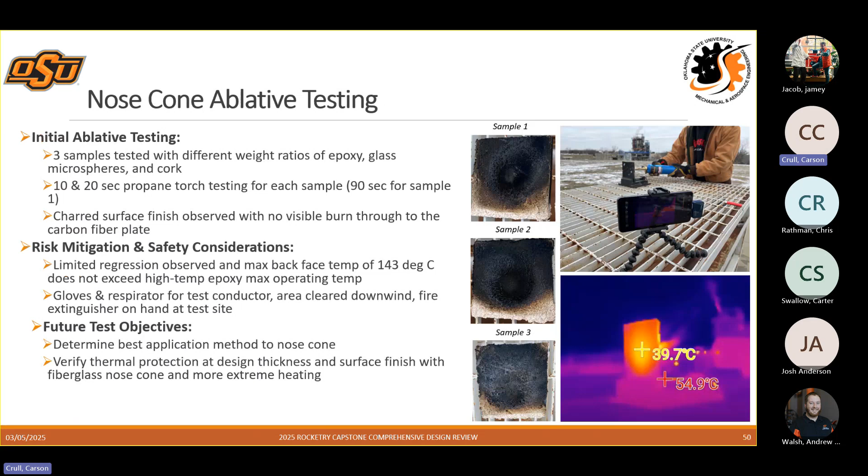That is something that we're looking into. That's a good point. I think right now we're baselining one of those structural epoxies you're looking for, in terms of the research we're doing in the wake of the Proline discovery. There's a bunch of other options out there. I think we have one of those baselined, but didn't put it here. I can't recall off the top of my head what it was.

In terms of making sure the epoxy does its job, there is a front part where it is a leading edge around where the actual scoop portion happens. It no longer is a leading edge, but we're looking into whether we need to apply some of our ablative coating there to ensure the epoxy doesn't reach up to its glass transition temperature, and also in terms of oversizing it to make sure we have plenty of margin there.

That's a good consideration, and it's also something we pulled from reference vehicles. Looking at reference vehicles, many of them have flown in similar flight regimes with either aluminum fins or aluminum shielding on the fins. So it's something we're tracking, something we're paying attention to, but it's not a major concern.

So my main concern would be the fillet. It looks like it'll have plenty of safety margin on the actual fins, but did y'all take into consideration that the aluminum would be not quite as strong as it's heated?

Yeah, so that's kind of part of the reason why we upped the thickness. For reference, the Project Mesos vehicle had a 0.165 thickness fin, and it went to a similar Mach number as us. That was on their sustainer, so we are thicker than that. And I believe on theirs they also did a tip-to-tip carbon attachment over their fillets, and that's something we're going to look at doing as well, just so it's not just one line of epoxy holding it on.

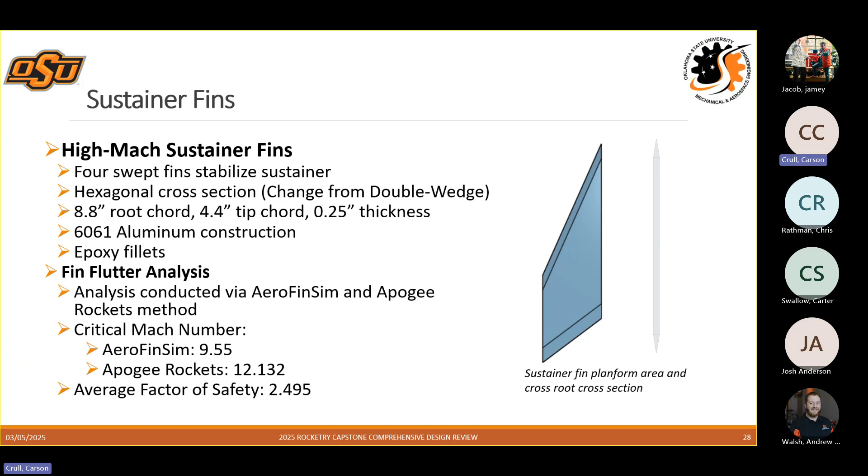And then booster tracking, is that just the RF tracker? So right now, essentially the plan is doing very similar to what the capstone team last year did. I believe unless this got changed, we still have the bottom exposed coupler on that booster, the non-load bearing section, keeping it fiberglass. So theoretically, once the vehicle's on the ground, or when that separation charge pops out, there's now an exposed fiberglass section.

And I think we're looking into the placement, because right now on the sled diagram, these ones are centrally placed, so we can move these up and down to make sure we get the TeleMetrums as much into that volume as possible.

And the big one is they have the whip antenna and the omnidirectional antenna, kind of choosing between those. This would be a good case where you can send the whip antenna or omni up into that fiberglass volume.

Like a 433 megahertz frequency of that tracker. So we could basically, from the launch site, send a vehicle out, have a read from one direction, have a read from a second direction, and triangulate to get a rough set of coordinates where we think it's going to be. And if we need more sets of triangulation to figure out where it's going to be, we could do more and more lines to refine that.

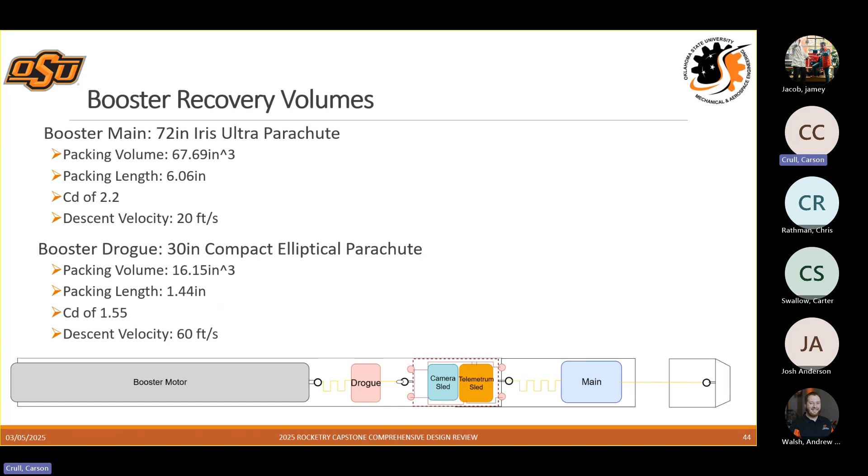Hopefully they had success with that. Again, they were going much lower, but we do have the advantage of the terrain at FAR. It's out in the desert, so there's a bit of micro terrain - there's going to be bumps and divots - but versus Argonia, Kansas, it's still pretty flat, though there are some slight hills, like major terrain that happens where you can get obstructed.

In terms of your sightlines to your vehicle, there's not a lot of that out at FAR, especially within the landing range of the booster. So we should have a pretty clear shot to find it. We're not too worried about it, but it is a thing we're tracking.

This is 30,000 feet altitude, right? No, for the booster it's 15, and it really brings it down the open end of the interstage. So the tracking on that is something we're tracking.

And something we're looking into as far as ground testing - I mentioned this so I kind of forgot to finish my train of thought there. With that exposed coupler, with the fiberglass, we were talking to some of the people from Castle last year to see if they had any experience with this. But we heard from them that it's not feasible to get a lock, at least with the TeleMetrums, once it's in flight.

Because they tried that very same method, where they had the fiberglass coupler section, they had the Yagis down in there aiming them at the rocket. When it popped out, they weren't able to get any reading off of that.

We're looking to potentially see if, once the vehicle settles on the ground, there's some directionality where you might be able to just get a sync, because all we need is a single GPS ping to be able to know exactly where this thing is. So if we're able to get a single signal received by a Yagi, that would also help.

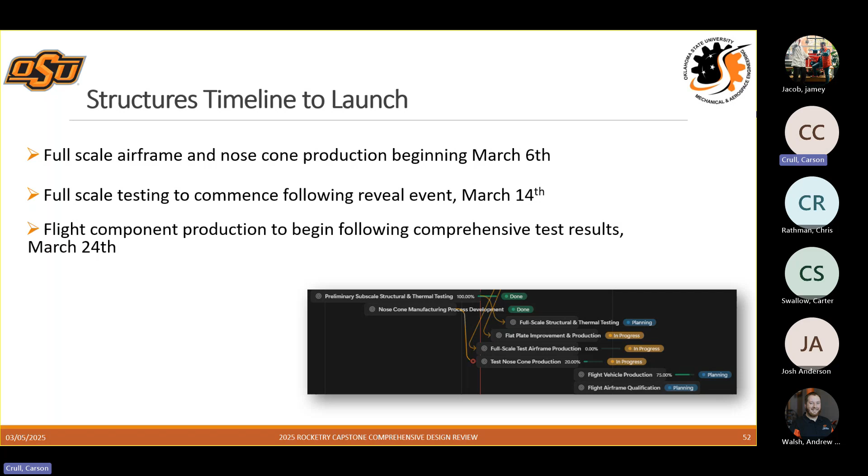Okay, and then one other thing timing-wise, looking at your schedule, you have from 3 p.m. until sunset to find it, in theory, in the worst case scenario, to find the rocket. What do you do if you can't find it that first day?

Yeah, that's a good thing to think about. In terms of trip planning, that's something you have to consider. You're going to try to book extra days of travel and Airbnbs, which will drive up the cost significantly. I do know one big thing about FAR is that it's a community of rocketeers.

Worst case, if the vehicle is out there and we can't find it, it's kind of like Argonia, where you're not going to have people out there looking for it every single day. But if someone stumbles across it and you've written your name in Sharpie on the inside, they'll bring it back to you. We'll get it eventually, hopefully. Unless it lands on a turtle, then we're going to have the police coming in and arresting us.

But that's another conversation we're going to have, like who's going, what cars we're taking, and who's going on their own dollar. A lot of us are paying our own way, especially for camping out there. We might be able to stay behind, but again it depends on what FAR allows.

If you give yourself that backup option of having one vehicle or one team able to stay the next day, that helps. If you don't find it the second day, you're probably not going to find it. Again, it's something we need to look into with FAR, what they regulate, because they're very strict about who's out there and how many people. So they might say, hey, if you can't find it, you can't come back.

The main thing is they control the site, they don't control anything other than the site. Being out in the desert around the site is totally fine. If we were to stay on to Monday, their launch schedule right now is Friday, Saturday, Sunday. So unless someone else had planned another event for that Monday, there wouldn't be anyone out there. So we couldn't go into their site because they lock the gates, but we'd still be out on public land.

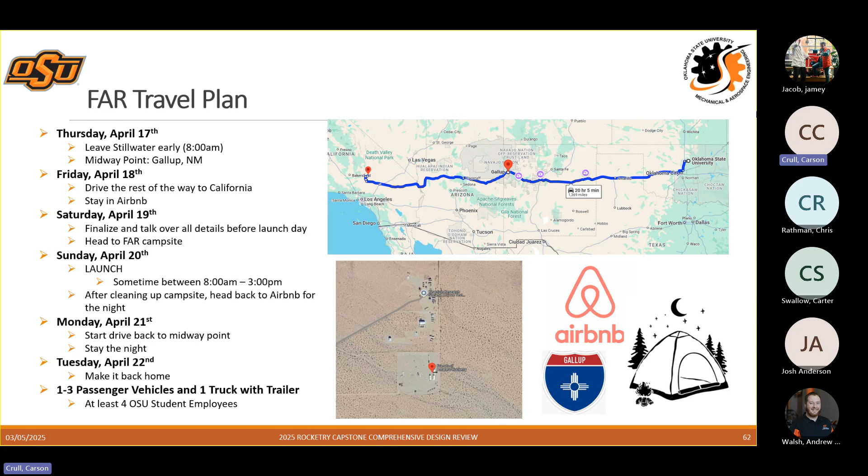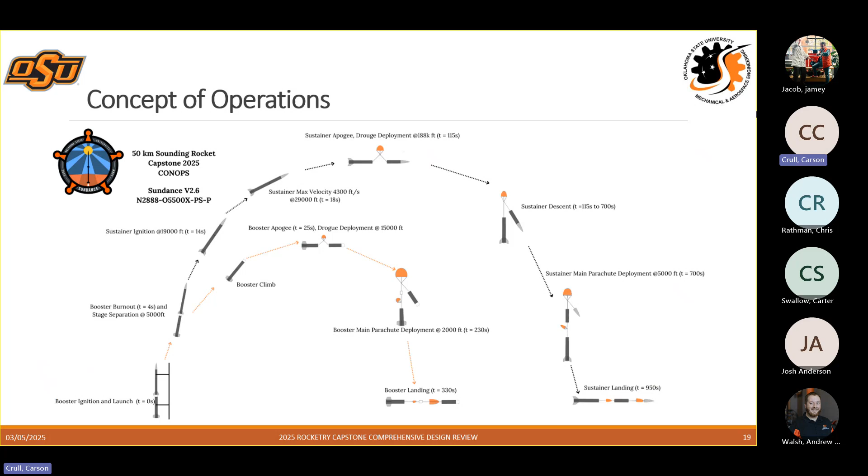Oh, I forgot to mention, we talked about this briefly on the ConOps. The reason we've increased the sustainer main deployment altitude - this is prone to a little future work, but we're doing it conservatively right now just to foolproof it - essentially the reason this went from 2,000 to 5,000 is, believe it or not, there are mountain ranges near FAR, the southeast and northwest ranges respectively, that are 3,000 AGL above the launch site altitude of 2,000, like 2,080 ASL.

So this is an AGL reference altitude here. Basically, we want to give ourselves a 2,000-foot margin for the parachute to deploy no matter what, because we've had experience with rockets where you deploy the main at 2,000 feet and then nothing's happening.

And then like the last few hundred feet before it hits the ground, you see that main beautifully unfurl and it saves the day. So that's kind of what we're baking in terms of main deployment.

But if this comes down over one of those mountain ranges, again it's not like the Himalayas, these all have roads going up and around them. It's very common for people who fly at FAR, if they end up in the mountains, to recover it. There's a bit of a concern there with the eventual recovery. It's mostly flat land with that exception. The benefit is it gives you a high point to look down on the surrounding area in terms of recovery. But if we do end up landing in the mountains, we've accounted for that on the sustainer.

The booster, I don't believe, is going far enough to warrant that. It shouldn't be able to go to either of those mountain ranges. The sustainer definitely could, though.

And I would like to see that from your Monte Carlo simulation, so you have some predictive analysis about where your likely landing locations are going to be. And then we'll help you target all these decisions in a more analytical fashion, especially building a model that we can update the day before and basically say don't launch with this, get the winds aloft, and you say okay, now we have 90% probability that we're in this region.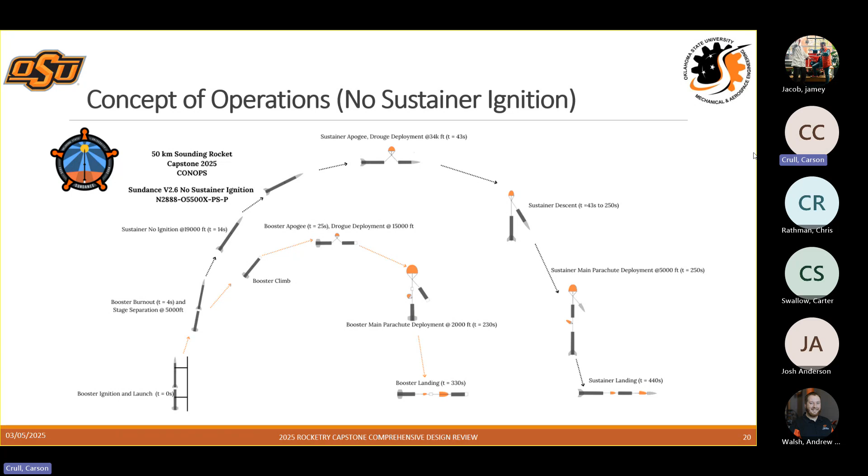Yeah, good, that's important. The Kate 3 also records audio from the flight as well. Oh good, I didn't know that. That's cool. So you should have that through the entire flight, even the cameras are... I don't know about that.

The calculations for the runtime for the cameras are on slide 94 as well. Yeah, I think that goes back to your decision - you're talking about the different options to trigger them.

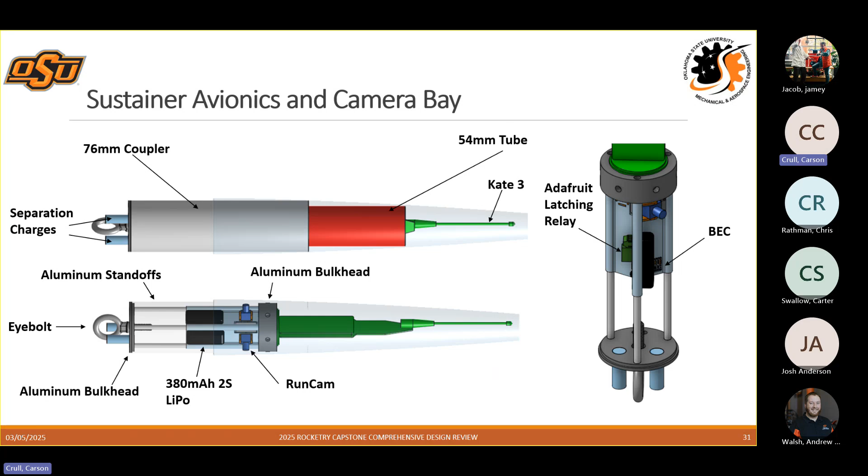So my highest launch was on a Terrier Orion 4 out in Wallops, and you had a camera that was triggered by the acceleration. So while you see most of the flight goes up to 87 miles, and all the way down until it lands in the Atlantic, you missed that launch. Because even just half a second, you're coming off that rail so quick. Man, having that as design 1 or 3, an option for this - anyway, it's something you guys should think about and figure out at some point.

But yeah, so we'll have that. Going to that, we have the 2 cameras, this approach going into both on the sustainer, kind of the operations for that. The last thing we'll do, right before flight, is shunt the igniter to check continuity, basically make sure this thing's ready to go, and we'll have cleared the pad by this point. Then we can send our command to enable the camera to start recording, and then send it. So we'll have that on the sustainer.

Booster, we have the accelerometer camera, and we also have the turn on and leave one.

The reason we put this on the booster is it simplifies the whole system if these are running off the same method, and it's already a pretty high reliability method. We have this control here just in case. Hopefully, if this fails, we have a known control and we'll have at least some of the flight footage. Unfortunately, not the coolest stuff in the sustainer, but this is again low risk. At least we're getting it right now. But the risk here is the operational concern that we have to turn this on before we do final igniter checks and clear the pad. And if there's a delay with weather, like a stray plane or something, this could be on the pad for multiple hours. I think this is a concern Josh Anderson raised at PDR.